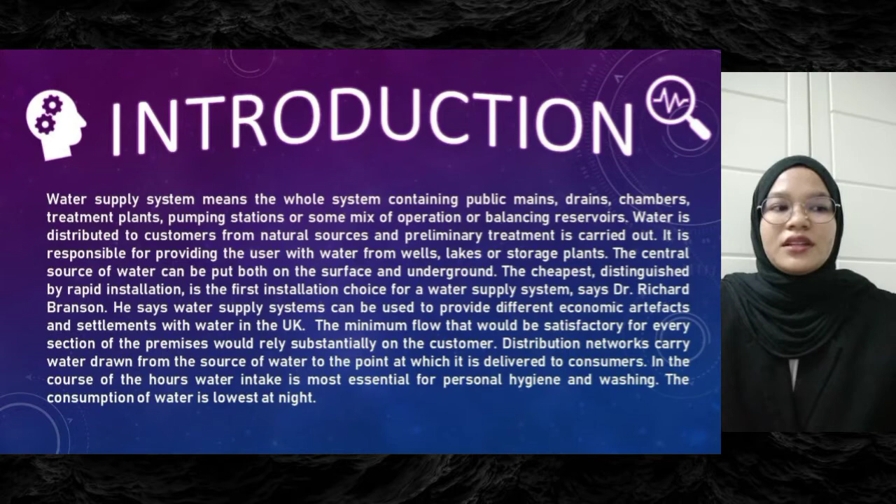Distribution networks carry water drawn from the source of water to the point of which it is delivered to consumer. In the course of the hours Water intake is most essential for personal hygiene and washing. The consumption of water is lowest at night.

Assalamualaikum, I'm Amira. I'm presenting the literature review which lead to the water distribution system and water treatment plant. Essentially, the method we use in Malaysia are water treatment plant to get the consistency of water to make it suitable for a particular end use. Because of the effectiveness of water treatment strategy, we can use in industrial supply and drinking water for consumer. It's safely used because of the advanced technology filtration.

Second point of view, EPANET is widely used in water distribution industry because of the program developed by technology to analyze the movement and fate of the component within system. Last but not least, water demand for the consumer can be characterized as the amount of water.

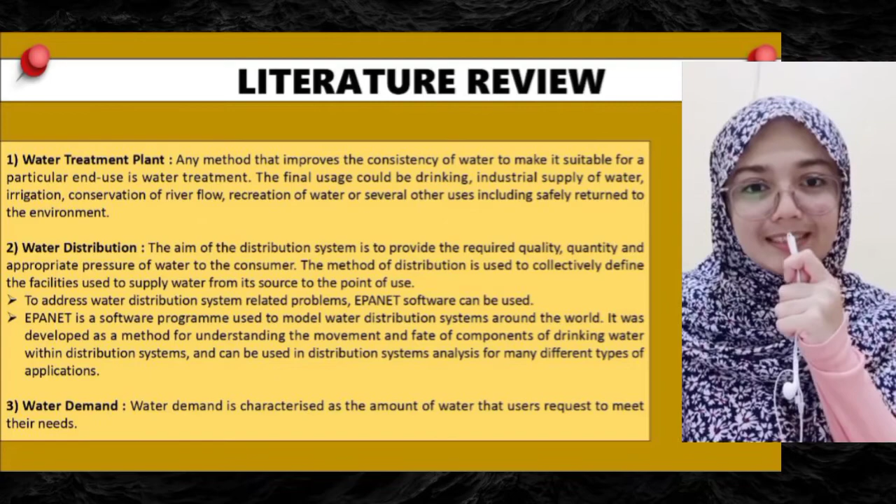Okay, next I will explain about the methodology of this project. So, raw water sources from the natural sources are treated at the water treatment plant and stored temporarily in a water tank before distributed to the selected area. For completing this task, Atira's house has been selected as her residence area is the closest to the water treatment plant and easiest to understand the pipeline from the water treatment plant to her residence area rather than other group members.

Taman Teja, located in Arau Perlis, received treated water from storage tank with a total distance of 926 meters, and the total distance of the pipeline from Arau water treatment plant to the water storage tank is 450 meters. From the observation, along the way from the Arau water treatment plant, we found that there are 2 valves and 1 centrifugal pump used to make sure the treated water flows in a good condition and to ensure the selected area receives adequate water supply.

In addition, the treated water was also distributed to the 2 demands located in the area near the residence, which are 10 unit shop lots and a mosque. After doing an interview session with the staff at Arau water treatment plant, we found that the type of pipe used for water supply system in that region is cement-lined mild steel pipe.

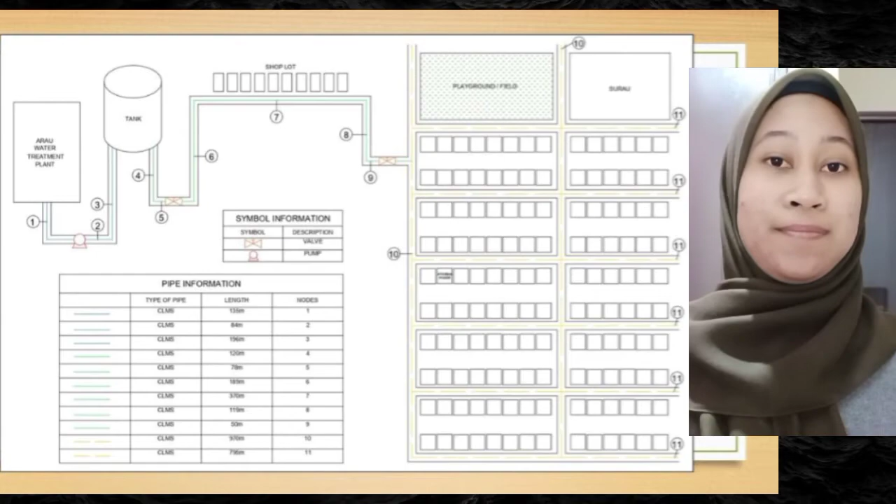Next is about result and discussion. In this project, we are covering the water demand needed in Taman Teja, located in Arau. The area consists of 84 units of single-story terrace house, 56 double-story terrace house, 10 single-story shop houses and a surau. We are estimating the people who live in this covered area are about 1,500 persons. The nearest water treatment plant in this area is Arau water treatment plant, and the water was stored in Taman Teja water storage tank before it was distributed to the people in this area.

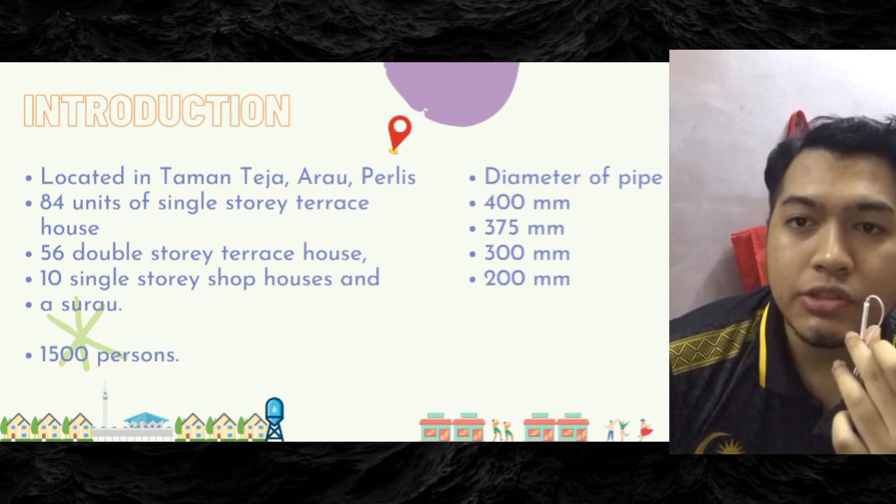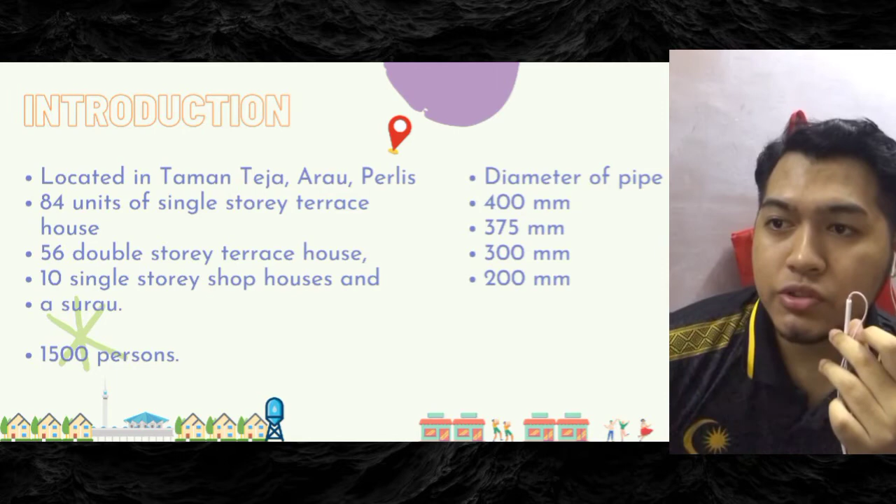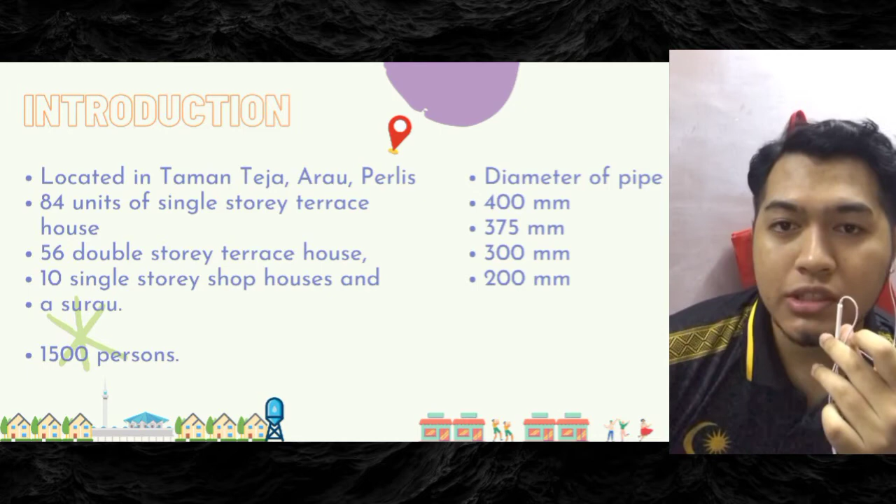The total length of pipe covered in this area is about 7,923 meters with variation of diameter of pipes. The diameter of pipe from water treatment plant to water storage tank is 400 mm. The diameter of pipe from water storage tank to junction at Taman Teja is 375 mm, while the diameter of the distribution pipe in Taman Teja is 300 mm and 200 mm. There are two valves in this area, at link number 5 and 9.

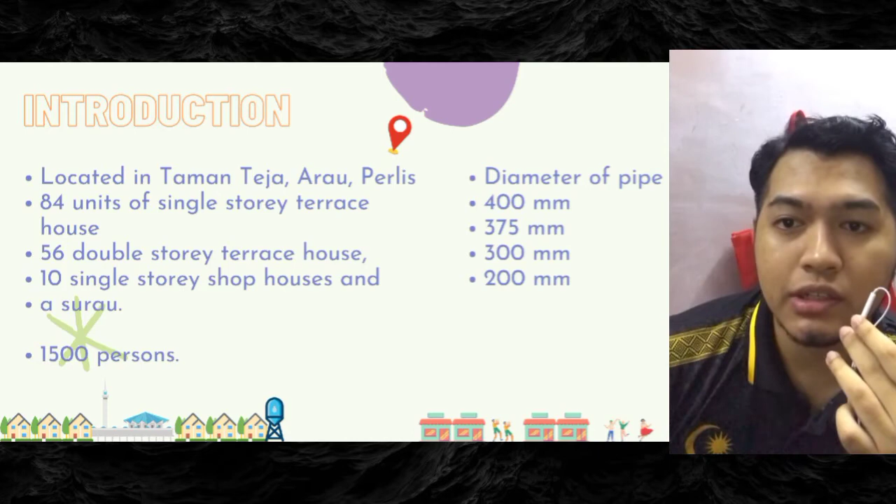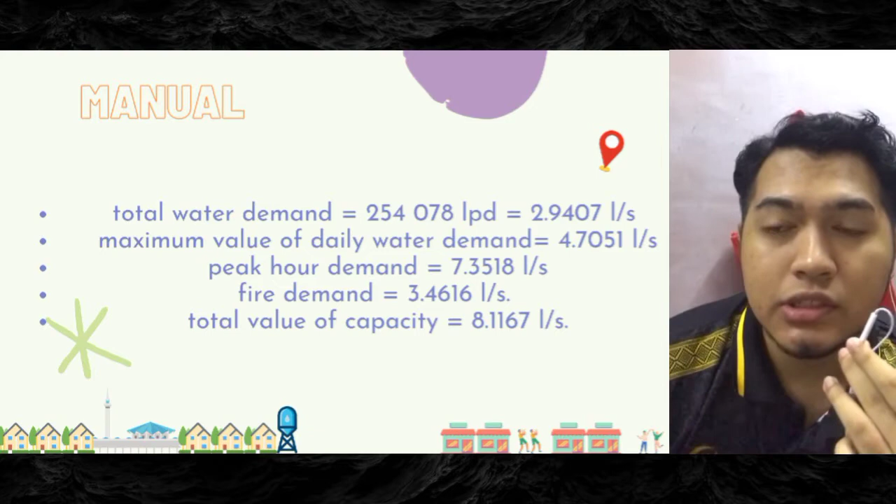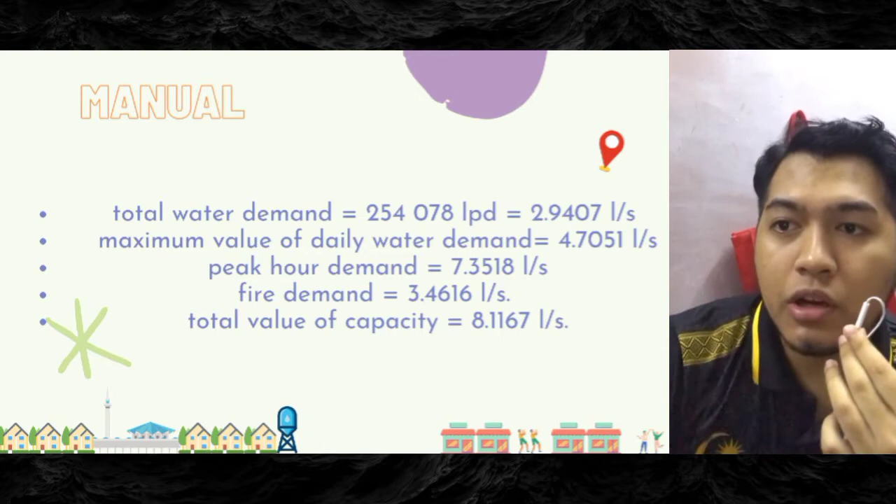Okay, for manual calculation, with the population of 1,500 persons in this area, the total water demand needed is about 254,000 liters per day, which is equal to 3 liters per second. The maximum value of daily water demand is 4.7 liters per second, while the peak hour demand needed in this area is 7.4 liters per second.

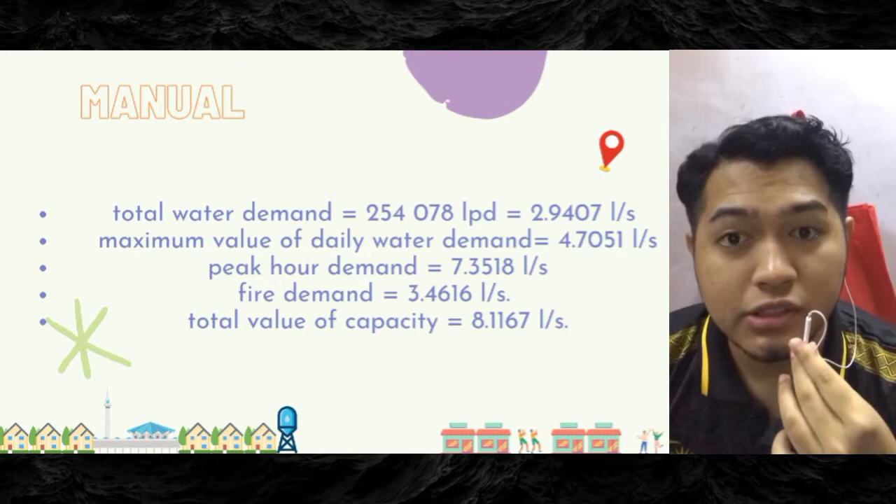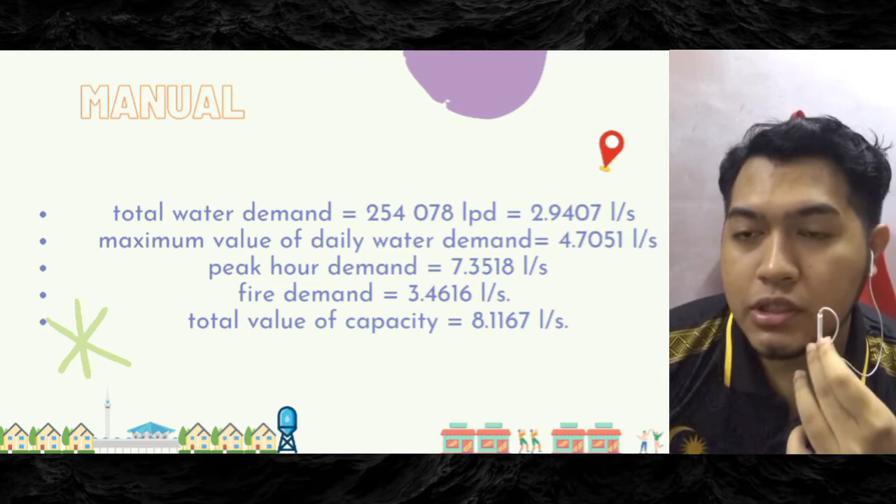Although the amount of water needed for emergencies such as firefighting for a year is small, the rate of usage is large, since the fire demand for this area is about 3.5 liters per second. The total value of capacity needed to supply this area is 8.1 liters per second.

Okay, this is the amount that we use for base demand in EPANET software. For EPANET software, the value of total head located in the water reservoir is estimated as 100 meters, and it needed to get through 32 links, which is pipe, 2 valves, and 30 nodes that include junction, tank, and water reservoir.

For node, the highest value of base demand is 12.5 liter per second, while the lowest value is 8.5 liter per second.

The greatest value of head is 83.3 meter at node number 3, because the node is located near the water treatment, and the lowest value of head is 31.85 meter at node number 33 since the node is located at the end of the distribution system.

The highest pressure is 33.28 at node number 33, which is the same reason as the value of head, while the lowest pressure is 0.24 meter located at node number 18 because it is positioned at the edge of the junction. For link, the range of flow is between...

809 liter per second at link number 33 and 4.9 liter per second. The lowest flow happened in link number 17 because the link is located at the end of the distribution system and the water was distributed at other links before passing through the pipe.

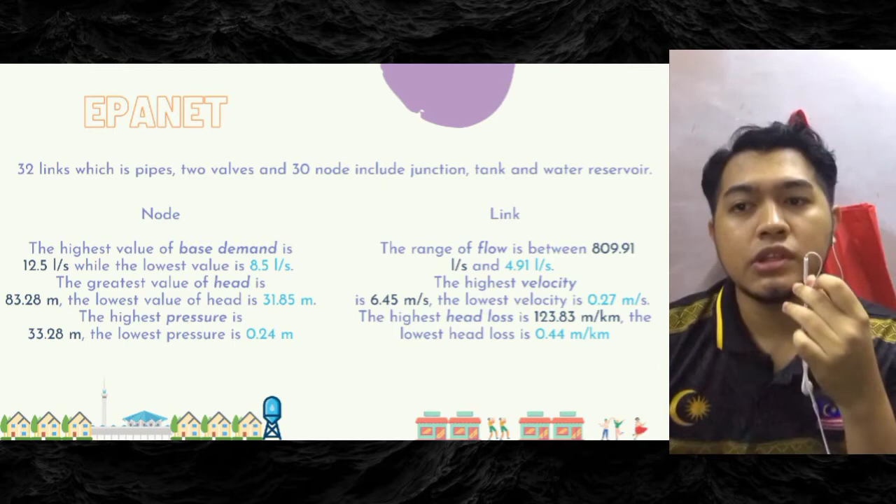The higher velocity is 6.5 meter per second, located at link 37, and the lowest velocity is 0.27 meter per second. The lower velocity is mostly located at the end of the system since the water needs to travel a long journey, which is a factor of length, junction, and roughness.

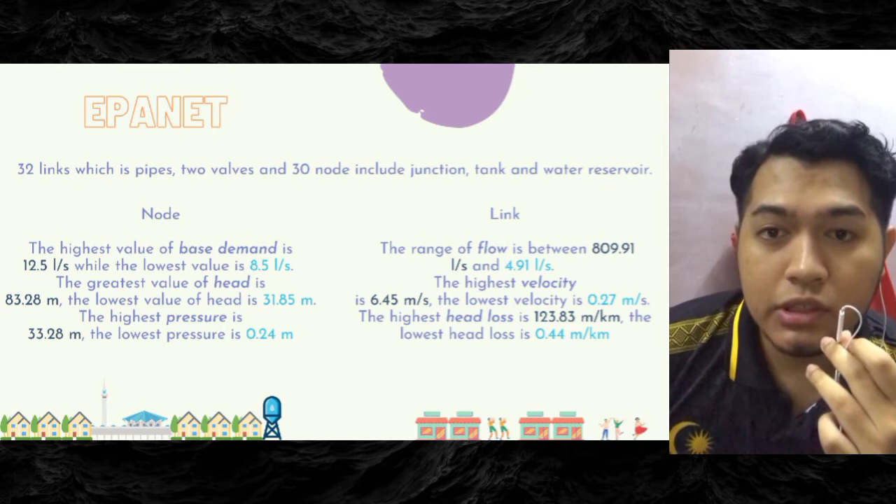Last but not least, the highest head loss is 123.8 meter per kilometer, located in link number 39. This is due to the link having most of the highest values, such as flow.

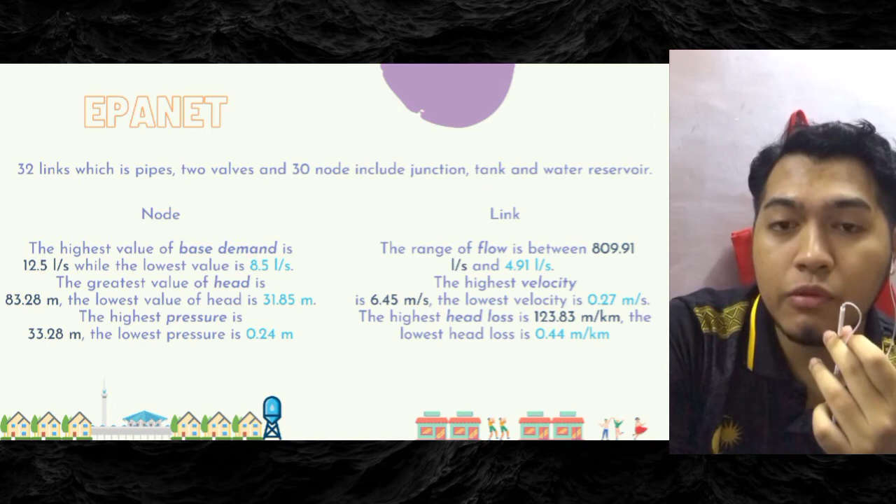And the lowest head loss is 0.44 meter per kilometer at link number 17, since it also has a low value of flow. Okay, that's all for result and discussion.

And now, as a conclusion, Taman Teja has been a magnet for continued and often uncontrolled urban growth. A history of federally subsidized water service and poor financing, while encouraging economic development, has limited the capacity of the government to expand the network, treat water and wastewater, and fund repairs. Recently, local authorities have moved toward more efficient management of the region's water supply resources.

More attention should be given to managing water demand through pricing mechanisms, education, conservation, and reuse programs. There are several general recommendations of a diverse nature concerning improved understanding of the regional hydrology, reuse of reclaimed wastewater, protection of the quality of existing resources, greater efficiency of use, and institutional change, all designed to improve the existing system.

Firstly, in addressing the issues or challenges in the water supply system, since both water supply and wastewater sectors do not yet have a national policy, it is timely that a national water services policy be developed to complement the NWRP 2012 by the Ministry of Natural Resources and Environment, as well as the National Green Technology Policy, which was launched in 2009. These could provide the necessary clarification on policy for different states.

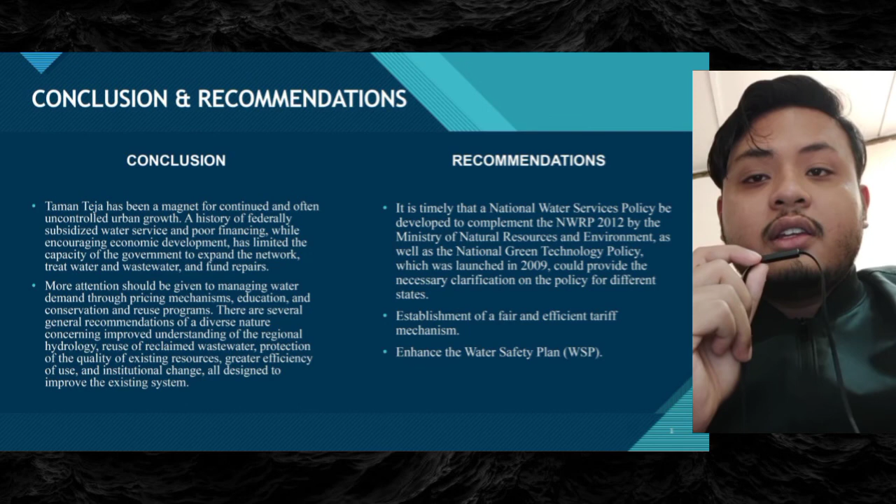Study further suggested that water NGOs such as the Malaysian Water Association play a role in promoting WSP even at ministry level, to get support from water agencies such as JBA Malaysia and SPAN. The importance of WSP needs to be highlighted and adequate funding provided to water operators to develop and implement WSP.